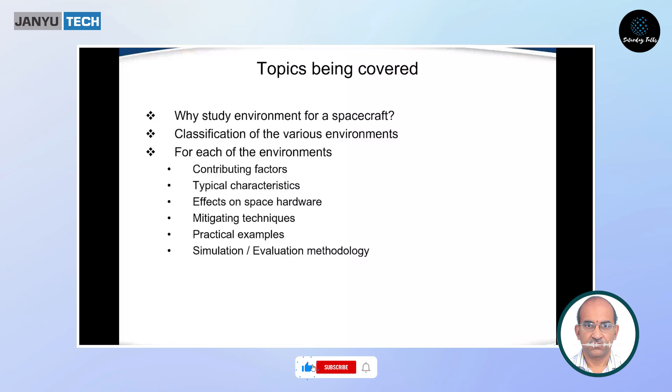If we take space history, many on-orbit failures when analyzed in a particular period, out of around 3,000 anomalies, 20 to 25% are traced to anomalies directly related to environment interaction—either the environment was not understood correctly, or it was not designed for that environment, or not analyzed for it, or not tested in that environment. So it's very important, if you are developing any product, to first understand the environment, then understand its impact, then design for it, analyze, and test before putting the product to use. Otherwise, we are bound to see failures.

Though considered perfect vacuum, space still contains significant amounts of neutral, ionized, charged matter and electromagnetic radiation. This matter has a very good potential to interact with spacecraft elements and impact mission effectiveness, and it can limit the life of some hardware. Studying this helps us possibly mitigate the effects, and it also provides inputs for environmental design, where you cannot design the equipment for absorbing that environment.

Then it should be possible to design it such that the system is insulated from the environment. Temperature is one such factor. If we cannot design for the total range, at least we can ensure that the thermal design keeps the equipment within its margins.

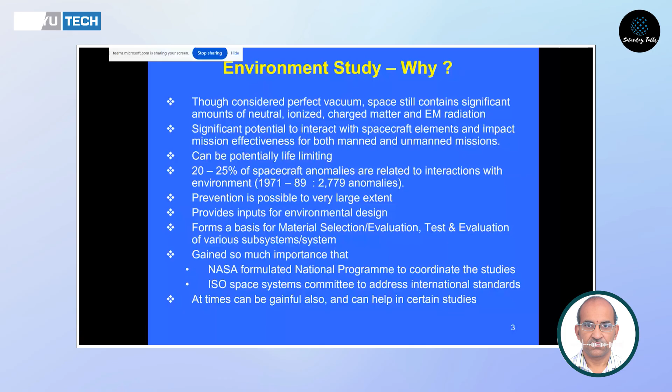At times, these environments are not always harmful. Some of them are actually useful, and we can use them gainfully for certain particular aspects. So if we talk about a spacecraft, the environment can be classified into three major categories.

One is the pre-launch environment: before launching, on the ground, whatever we are doing, during transportation, handling, regular ground testing, and storage. Even after the spacecraft is made ready, sometimes launch may take place after a while, so storage conditions matter. In the pre-launch environment, the major factors are temperature, humidity, and electrostatic discharge.

Even with clothes, during certain seasons, if humidity is low we get a slight shock - that is due to electrostatic discharge. So ESD is another environment factor. It is prevalent on the ground, and there is another kind of ESD in orbit which we will also discuss.

Particulate contamination is another factor, since some equipment needs to be assembled and operated in a very clean environment. Unless we seal that equipment appropriately, during fabrication and before sealing, contamination control is another important aspect as far as the pre-launch environment is concerned.

With respect to launch, this is the actual period of rocket flight to go to space. While taking the spacecraft into orbit, the launch vehicle will take it to orbit over 20 or 30 minutes, whatever the duration.

During that time, the temperature changes, the pressure decreases as we go higher, there is acoustic noise associated with the spacecraft, random and sinusoidal vibration, and shocks that happen during various stage separations. The actual spacecraft separation from the launch vehicle is itself a major shock-inducing environment, so all these aspects have to be considered.

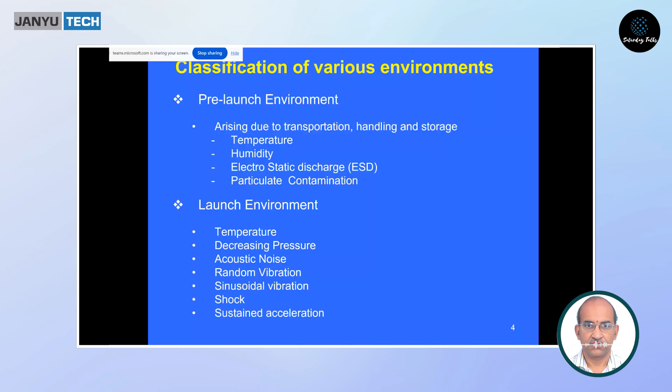The most important of all - though all are important - is this: a spacecraft is going to live in that environment for 15 years. If we take a geosynchronous orbit, the spacecraft has to operate for 15 years without being attended to.

That is the major challenge as far as spacecraft is concerned - for 15 years it has to work in this unknown environment without being attended to, except for some regular housekeeping operations. Some commands may be given, but we cannot go to the spacecraft, access it, or repair anything.

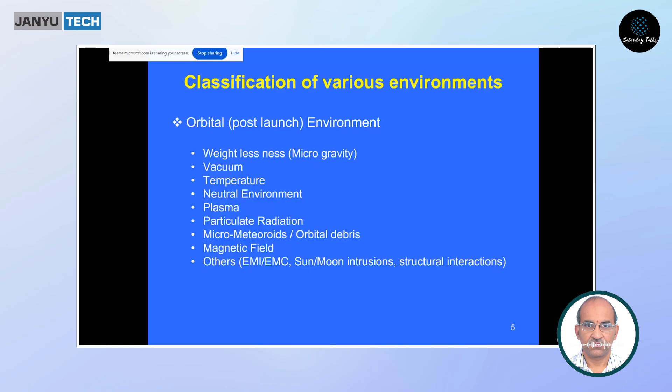Under the orbital environment, the obvious thing is weightlessness, which we see in any space station, with astronauts struggling due to microgravity and its own impact. There is also vacuum, temperature, neutral environment, plasma, radiation, micrometeoroids and orbital debris, which is much talked about these days, and the residual magnetic field itself - as you go away from the ground, the field becomes inversely proportional to orbital height, following the inverse square law. Other aspects like EMI, EMC, sun-moon intrusions, and structural interactions also have to be considered.

With respect to weightlessness, the contributing factor is the balancing of gravity by centrifugal force, because the spacecraft is orbiting around the Earth, resulting in zero G, or near weightlessness.

So that is the factor which contributes to the weightlessness. And what are the characteristics of weightlessness? At 400 kilometers, 88.8% of its gravitational field still remains. So absolute weightlessness is experienced if the sum of all forces is zero at all points of an object, which is not practical due to the finite dimension of the spacecraft body.

There is a theory around that, but what are the effects basically? We have got some deployment mechanisms in the spacecraft. Their behavior will be affected, because on ground when we are doing assemblies, it is all at G level, but in spacecraft it is zero G. So all our ground testing is affected, because you cannot design your hinges and all to withstand 1 G, since that becomes an over design.

Weight is another important factor, so we will not be doing the over design. So then how to test it on the ground? That is an important aspect. That's why we are having zero-G simulators and all those aspects.

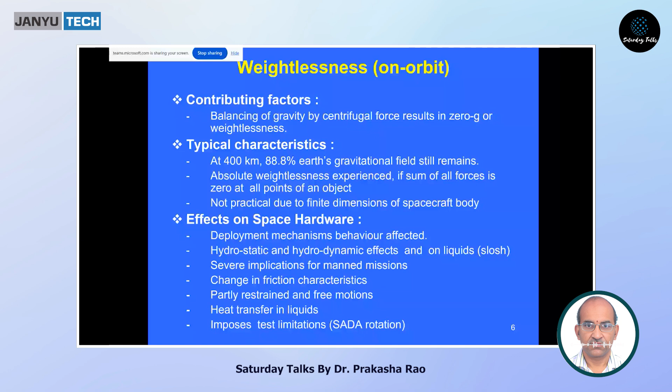Then there are hydrostatic and hydrodynamic effects on liquids. How a liquid behaves in weightlessness will be entirely different from when G is there. Gravity is pulling the liquid and it has a formal shape, but once it is not there, if there is a little bit of vacuum space, empty space, in the tank, the liquids will be sloshing.

So even our tankers, like milk tankers, petrol tankers, or anything that carries these fuels, the slosh effect is a very significant aspect once you empty it to some extent. Even if you carry one pot with water, if it is half filled, the slosh effect can be felt. Then under severe conditions and under vacuum, it becomes worse.

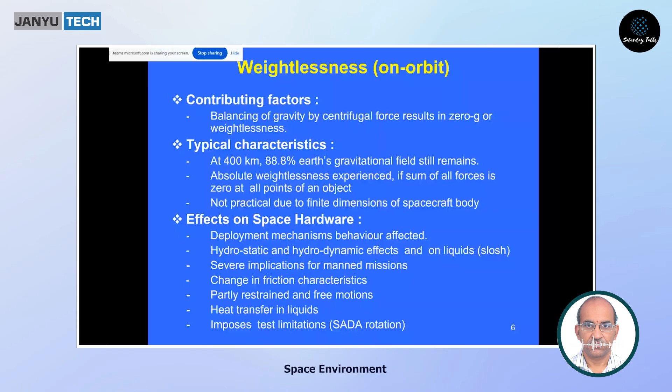There are severe implications for weightlessness, and it becomes worse with severe implications for manned missions, because the human body is designed for a G environment. So all the activities which we do effortlessly on ground, right from the time we get up till we sleep, become very major activities when we have to do them in space. Accordingly, the systems have to be designed.

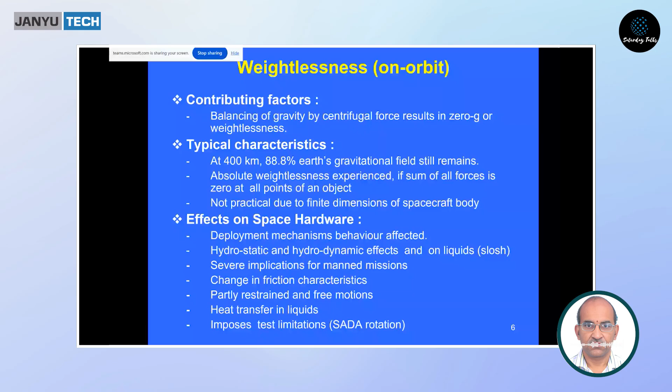Then there are frictional characteristics, because of bearings, lubrication and all those aspects, when G is not there. Those frictional characteristics have to be seen, partly restrained and free motions, and liquid heat transfer mechanisms will be impacted. It imposes test limitations, like for the solar array drive assembly, which we test on ground, it is difficult to test because zero-G simulations are difficult. Otherwise, the solar array drive bearings and slip rings transfer 10 to 20 kilowatts of power, generated on solar panels, into the spacecraft electronics. This happens through slip rings and all those things, so weightlessness imposes some limitations on those testings.

We overcome this by various mitigation techniques. With respect to slosh, you cannot do anything on ground, but it has to be modeled and the impact has to be studied. That is what they do for propellant tanks. There are also some vanes designed to reduce the impact of slosh, so this requires a lot of mathematical foundation.

We have to design for zero-G loads, and also for training of crew. That's why they spend years to train a crew, because of zero-G they have to get used to that, and for that, various simulation facilities are there. Training of crew is another important aspect.

Baffles and vanes are used to dampen oscillations due to liquid movement in propellant tanks. But with respect to electronic hardware, the impact of weightlessness is not much, it's not really there. It is mainly with respect to mechanical systems, bearings or hinges and all those designs.

So there we have to account for the weightlessness environment. With respect to simulation or evaluation methodology, zero-G simulation is for mechanisms, and testing in aircraft with scale model tank simulation is for parabolic flight paths, where at the vertex we can get zero-G. Even in a giant wheel, just when we are about to change direction, we feel a zero-G effect for a very short duration on ground. But there are ways to simulate this, like taking a parabolic flight path to test certain systems.

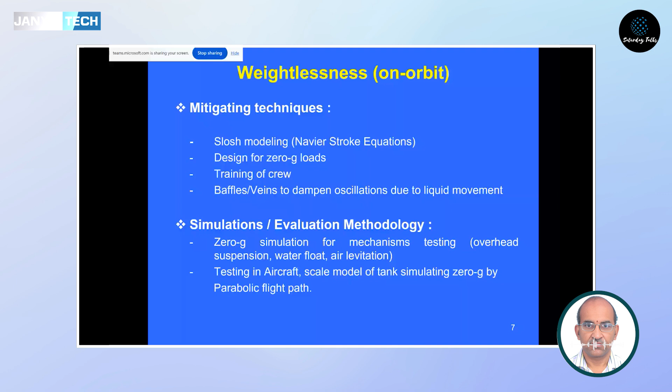That is one way, but otherwise, in general, zero-G simulation is quite involved. Then the most predominant environment, especially for electronic systems, that we have to consider most is the vacuum. Because the contributor factors are: not directly electronics, but vacuum has impact on temperature that will in turn affect any electronic device.

So pressure drop with altitude. At sea level, the pressure is 760 mmHg, that is 760 torr, since 1 mmHg is called a torr. In terms of mean free path, at that pressure, the intermolecular distance is 5 into 10 to the power of minus 4, that is 0.5 mm. So between two particles, the distance at sea level is 0.5 mm.

But as you go to 200 kilometers, the pressure will drop to 1 into 10 power minus 6, and the mean free path is 50 meters. Why this mean free path is important is because when we want to simulate vacuum, it is that mean free path which we have to simulate. At 900 kilometers, 10 to the power of minus 6 torr is the pressure, and the mean free path is something like 500 meters, half a kilometer between two molecules. At 10,000 kilometers, you can see it's almost, you cannot see the distance.

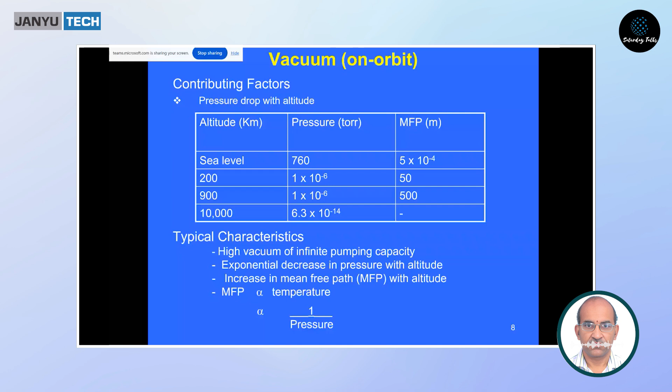So typical characteristics of high vacuum is infinite pumping capacity. The moment you throw some object into space, you can think that you have thrown it into a pump where the pumping capacity is infinite, so whatever is there can be sucked out. There's exponential decrease in pressure with altitude and increase in mean free path with altitude, and the relations are here.

Differential expansion and contraction joints of dissimilar metals. Changes in frictional characteristics will happen due to temperature. And in electronics, increased failures - the failure rate, even we, if we get heated very fast, we get all kinds of diseases, correct? That is the result of thermal impact, so the life will come down with respect to electrical parameters. The Arrhenius reaction rate model describes the impact of life with the temperature.

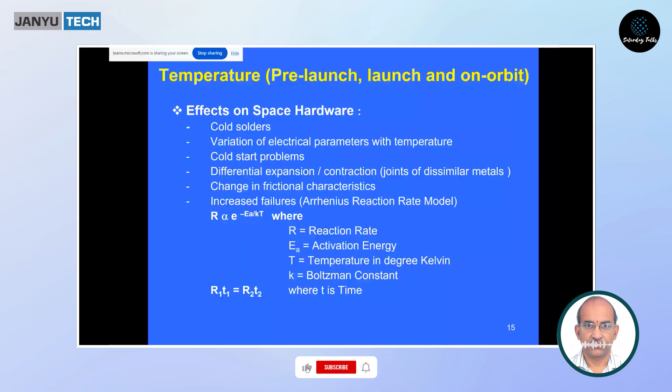The most important aspect is thermal design has to be proper to maintain the subsystems under safe operating limits. And derating - what we do is, if a component is rated for 1 watt, we will be using it for half watt only. If it is a 200 volts capacitor, use it for 100 volts. This is to extend the life.

Temperature compensation provision for sensitive elements, design qualification to ensure margins - what we do is the qualification model will be built where we overestimate temperatures, give sufficient margin, and test so that the design margins are ensured.

Simulation-wise, thermal and vacuum combined can be tested in thermal vacuum test. But in vacuum, as I told, it can go to 10 power minus 12 torr also. Simulating that kind of mean free path, which we told is 500 meters or much more, how do you simulate in a finite chamber of half meter size? You cannot simulate this kind of mean free path. So even 10 power minus 4 torr or 10 power minus 5 torr, we are able to simulate on the ground, so that if we are able to do most practical applications, that is adequate.

Thermal balance test is done to evaluate that our thermal design is correct. Under thermal balance, what we do is one side we simulate sun, solar radiation, another side we simulate Earth's albedo, and solar is simulated by a xenon arc lamp simulator.

We also simulate the spacecraft itself going through summer solstice, winter solstice, equinox, and all those things. For all of those aspects, the spacecraft will be rotated to simulate the angle between the orbital plane and the equatorial plane, whatever angle is there, and the sun angle also. Sun will be changing even every day - if we dry our clothes, we know sometimes sun will come this side, sometimes south, sometimes north.

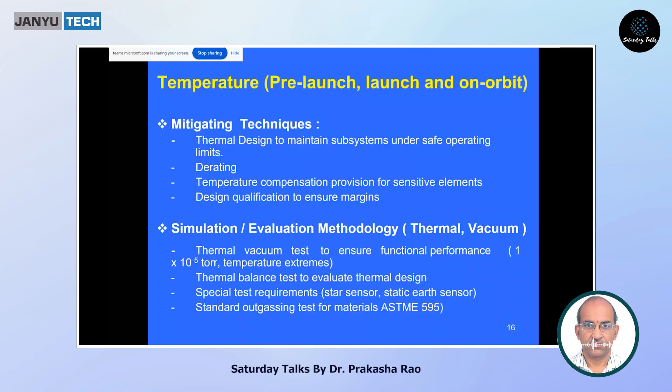Slowly it will be drifting, and that will all change the thermal design. So for simulating that motion, the spacecraft will be mounted on a rate table and the required angles are given to create various seasons for testing.

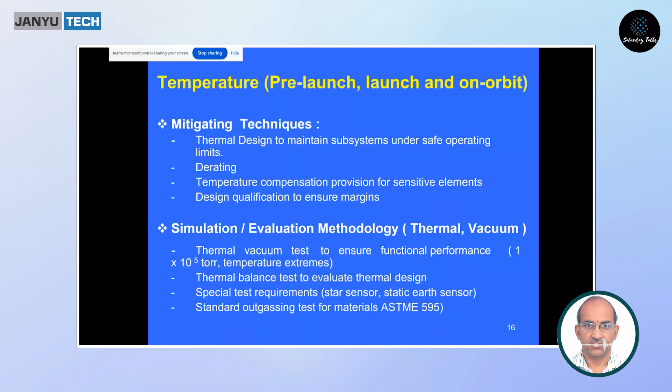Special test requirements are there for star sensor and static earth sensor, and standard outgassing test for materials. These are all done. Then we talked of temperature, vacuum, weightlessness. Now we are coming to the particles.

There is a neutral environment. Contributing factors are neutral atmospheric density. At low Earth orbit, it will be 10 to the power of 15 oxygen atoms per meter cube. High orbital velocity - though they are oxygen atoms, so size may be small, but kinetic energy will be there.

8 kilometers per second orbital velocity will be there for those particles, and a large number of collisions will be happening between them with ambient atoms - that will be 3 into 10 power 22 collisions per hour per 1 square meter of spacecraft. So they are constantly impinging on the spacecraft outer surfaces. This is significant in low Earth orbits.

And atomic oxygen - that is a very, very corrosive element. It is prevalent up to 650 kilometers, and it's a function of solar cycle.

Solar cycle, I think people will be knowing. The sun has got a cycle of 11 years approximately. So the environment, the sun's intensity or whatever its own ferocity will be changing as a function of solar cycle, depending on which part of the cycle we are in.

Above 650 kilometers it is less, but especially around 400-500 kilometers it's significant - that's why we don't keep those things there. Atomic oxygen effect will have a very severe impact on the solar panels and all.

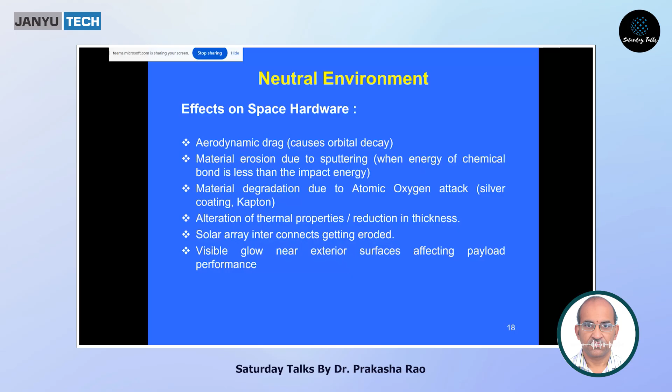Effects wise: aerodynamic drag, as particles are constantly impinging, causes orbital decay and it will slowly degrade, coming back to Earth's atmosphere sooner. Material erosion due to sputtering, material degradation due to atomic oxygen attack, especially on silver coating and Kapton - these are done to overcome those things.

But silver as such can get a very fast reaction, so alteration of thermal properties, solar array interconnects get eroded. Visible glow also - sometimes on payload performance you can visibly see a glow.

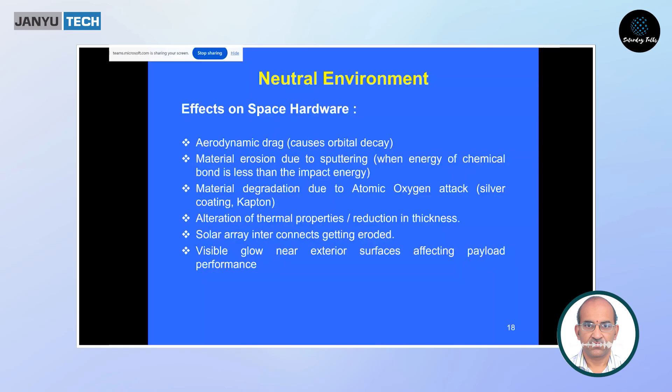So mitigating techniques: of course material selection has to consider atomic oxygen resistance, glow characteristics, sputtering thresholds, configuration to minimize the drag by flying the vehicle. Dynamically, aerodynamically, you have to design such that the impact of these particles on the drag is minimized - whatever the direction of particle impingement is, you would fly with a different angle so that the impact is minimized.

Orient sensitive surfaces and optical sensors away from RAM direction. Use protective coatings, and choose orbit to minimize effects. Proper sizing of propulsion and control elements to take care of these impacts - these are all the mitigating techniques.

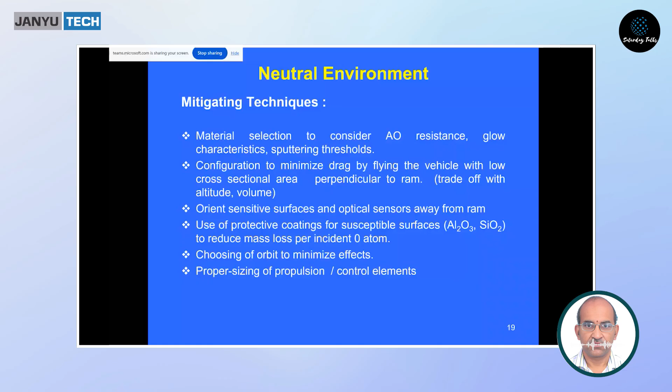So how to simulate a neutral environment? Theoretical analysis for expected mission profile is one aspect, and atomic oxygen impact test can be done in limited controlled conditions using particle accelerators, which can create the 5 eV energies associated with orbital impact kinetic energy.

This is at a material level - total spacecraft or equipment cannot be tested. At material levels, these studies can be done.

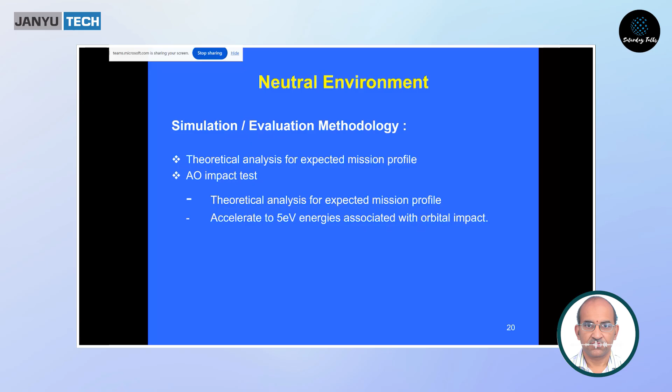So we talked about all this orbital neutral environment - it was not having any charge. But now we are moving from neutral environment to plasma. Plasma is produced by heating of a gas. When an atomic electron receives enough energy to escape electrical attraction to the nucleus, this produces a mixture of negatively charged electrons and positively charged atoms - so you are having ions here.

It's produced by photoionization from solar ultraviolet radiation, causing ionization of ambient neutrals, and by transport from other regions, and it's also a result of geomagnetic storms. Plasma can be defined as a gas of electrically charged particles in which the potential energy of attraction between a typical particle and its nearest neighbor is smaller than its kinetic energy.

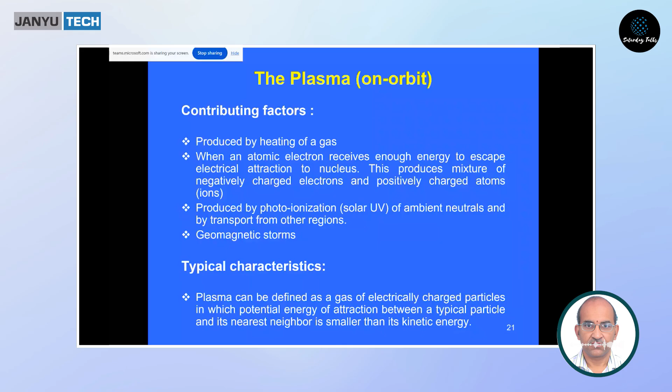This is how plasma is produced. If kinetic energy is less, they recombine, establishing neutrality. But 99% of the universe is plasma. During geomagnetic storms, higher energy plasma is encountered between midnight and 6 a.m. So for spacecraft orbit - earlier I told about the effect of electrostatic charge on ground, like handles also in dry places.

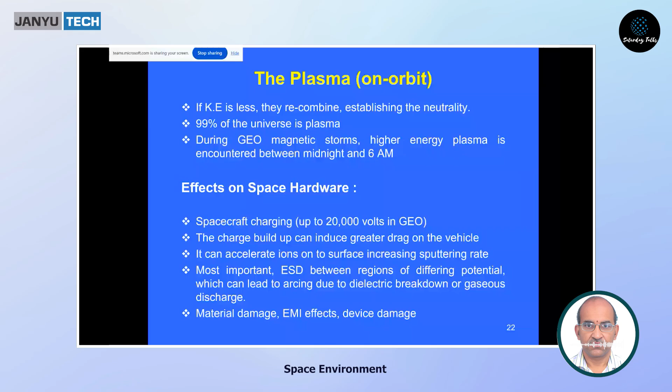If you go to other Western countries where humidity is not there, if you touch a handle, unless it is grounded, we can get an electric shock. Our clothes, when we take out, that is a very normal thing, our hair, you can get a shock. So that is on the ground, that is a triboelectric effect.

But here it is spacecraft charging. This is due to buildup of potential, because the outside surfaces are dielectric, and these charged particles are impinging on that. So the outer surfaces, potential will go up, and it can result up to 20,000 volts in geo. Here it is a potential difference.

Why does the potential difference come? When the surfaces are not equipotential, that means they are not conductive. If you have a perfect metal sheet outside a spacecraft, there is no problem, because all the charge will be uniformly distributed. Even if it is 100,000 volts, no problem. Like crows on an electric wire, they are safe till they touch a second wire. Only when it touches neutral, it will get killed. So as long as it is equipotential, no problem, whatever be the charge.

But that is not possible because we use all kinds of surfaces on the spacecraft, so there can be differential charges produced. Once there is a differential, electric arcing can happen. That is where electrostatic discharge will happen, and that arcing will produce such high currents which can kill the electronics inside the spacecraft.

So the charge buildup can induce greater drag. It can accelerate ions to the surface, increasing sputtering rate. Most important, ESD between regions of different potentials can lead to arcing due to dielectric breakdown or gaseous discharge, then material damage, electromagnetic interference effects on devices. Nowadays microelectronics is so small, devices have gone below micron level, submicron level, so they can easily get impacted by the effects of electrostatic discharge.

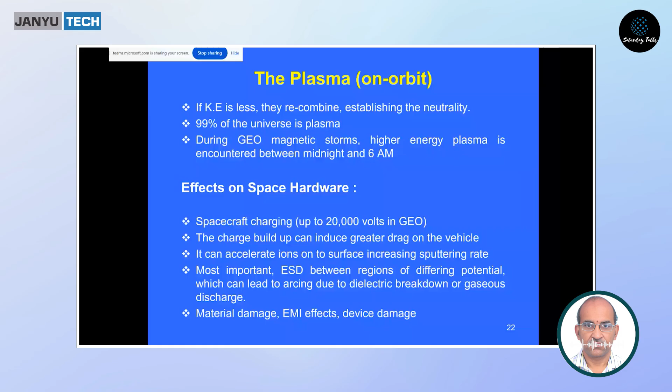So for plasma on orbit, how to mitigate: make exterior surfaces of uniform conductivity if possible, because in some cases it's not possible. Then we put some buttons, and grounding outside — you intentionally create some small buttons and connect all of them through a wire or something, so that outside things get neutralized. Whatever plasma is impinged, the differences in potential are avoided. And there is grounding, EMI shielding and filtering for all electronic circuitry, and active current balance by a plasma contactor.

This is an active method. Other things are passive. Or grounding of all unused wires — simply one wire without grounding, if you leave it floating, this can spoil the equipment inside.

We saw this ourselves. We faced it in our first communication satellite, INSAT 2A. A big instrument like VHRR had one floating wire. Later we traced that it was affecting control system performance.

So for ESD testing, there are different testing methods and equipment available to create ESD — radiated discharge, single point discharge, structural current discharge. I'm not going to explain each of them, but there are methods available which you can use to create and test for these factors.

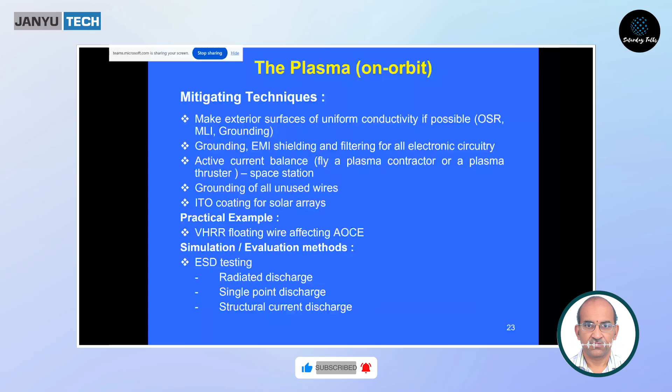Then comes particulate radiation. Earlier we were talking about the charged environment; here these are particles. Trapped particles are there, something called Van Allen belts, at particular heights and between certain latitudes or longitudes. The name is given by the inventor of those belts. So trapped particles are there.

There are high energy particles, solar protons, having very high energy. Cosmic rays, which are of galactic origin, coming from distant stars and all that. Solar wind itself is there, and low energy charged particles, which are trapped in the geomagnetic field. And there is a very specific region called the South Atlantic Anomaly, an anomalous region where these particles have much higher densities.

Typical characteristics are: it consists of energetic charged particles, having energy and charge also — electrons, protons, neutrons, heavier ions and photons. All the types of things are there. X-rays, gamma rays can penetrate through the surface layer into the material underneath. Even if you have a surface like an aluminum box, still they can penetrate through that also, because they have lots of energy. The energy level and flux are highly dependent on orbital height, location, and time.

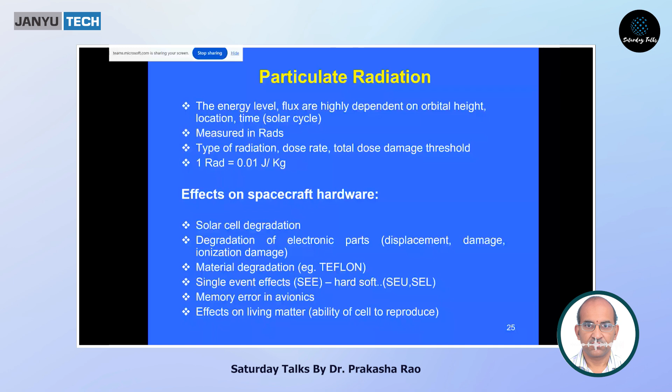So when required, we build what is called radiation hardened electronic devices, and they are very expensive. Just to give an example, a normal FPGA may cost a few hundred or thousand rupees. If it is radiation hardened, it will cost 25 lakhs versus 25,000 or whatever. That is the kind of cost difference when they get radiation hardened, because the quantities are less, the consumption is less.

And here the thing has to start from the wafer level. So you have to have a separate line for producing these quantities. Very small quantities for producing these devices, but you need to have a separate fab. So that's why it becomes so expensive.

Effects on the spacecraft hardware are solar cell degradation, electronic parts and material degradation, and single event effects. What this means is suddenly when a particle passes through these devices, like RAM and other memory devices, at one particular location a state change will happen.

But if that particular location happens to have some software code, your program can misbehave. So then how memory error in avionics affects living matter, the ability of a cell to reproduce. Human beings also, you would have read a lot nowadays with all the people going there. So there is an impact of radiation on human health also.

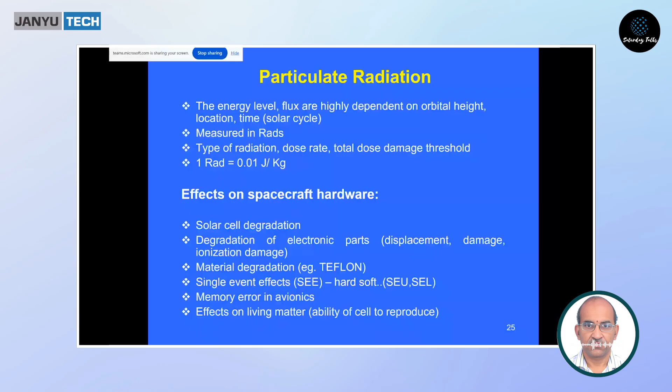So how do you mitigate? One is radiation shielding. There are some materials like lead which absorb radiation much more effectively than steel or something like that, so even a small thickness will help, but the penalty will be the weight. Another is the use of rad-hard devices with specified total dose, where the penalty is of course cost.

And there are other things to avoid software failures due to memory corruption. We use majority voting, error detection and correction, watchdog timers, and safety logics. The problem with EDAC and majority voting is, if you want to put majority voting, you have to compare 2 out of 3 and take a decision.

Then your hardware, if one is needed, because you have put majority voting, it has to be tripled. So the devices, the hardware will be tripling. That is the kind of impact. But if you have to survive for 15 years, you have to do that. That's why space systems become so expensive.

Practical examples, okay, I'll skip this. Particulate radiation - then how do you simulate?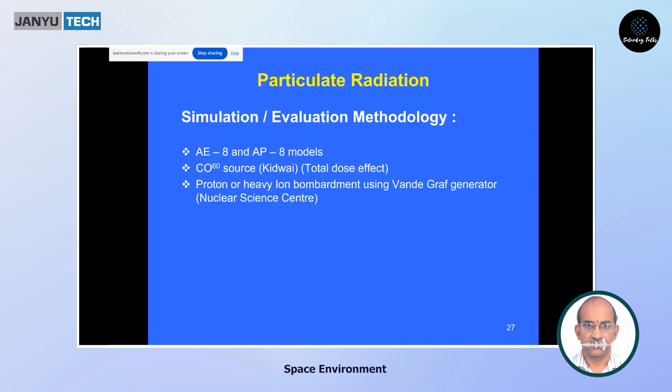Then proton or heavy ion bombardment using a Van de Graaff generator at the Nuclear Science Center. So there are methods. Then micrometeoroids and space debris.

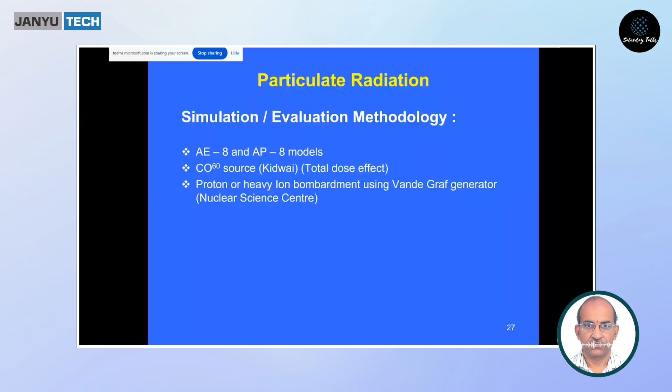Micrometeoroids are natural, nothing you can do, they are there. Space debris is man-made. So how do we handle it?

Breakup of comets, asteroids, leftover pieces of non-operational spacecraft, boost stages. Even rockets, once they go out of the sphere of influence of Earth, the stages are still floating, maybe for a month or 15-20 days. Till then it is debris - it is an environment. If you are launching another spacecraft, it may hit it.

Up to 0.1mm, thermal blankets or structural panels can take care of it. But beyond that, it's difficult.

Orientation of sensitive surfaces away from ram, Leonid shower, and like that. When it happens, our spacecraft centers will do operations on the spacecraft to move them away from the most predicted zone. And choice of orbit is important.

Shielding by a bumper on the leading edge is not done for regular spacecraft, but for human space missions, because life is involved. So that shielding is there.

Avoid using single stage to orbit boosters - these are guidelines, these are all conventions. Whether people follow them or not, China doesn't follow them. Longer life satellites, so that debris will come down. Venting fuel tanks at the end of mission - venting means removing the fuel.

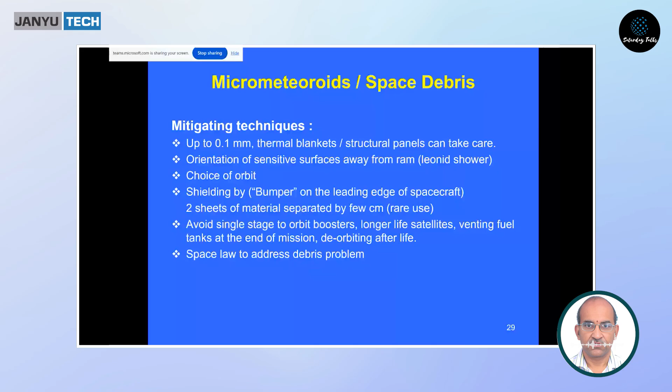Practically, 27 windows were damaged in 8 flights of the shuttle out of 30 missions. On STS-7, a 0.2 mm diameter fleck of paint impacted a side window. Cost of refurbishment was $50,000.

So this is from some book I have taken—simulation and evaluation methodology, hypervelocity impact studies, Van de Graaff accelerator. You can see the level of acceleration achieved, 40 kilometers per second on a particle of 10 power minus 10 grams. I don't know how they do it, but there is equipment available to do that. Larger masses are accelerated through light gas guns. There's study of shock wave propagation by numerical methods, and impact probability studies—models are available for estimating the flux.

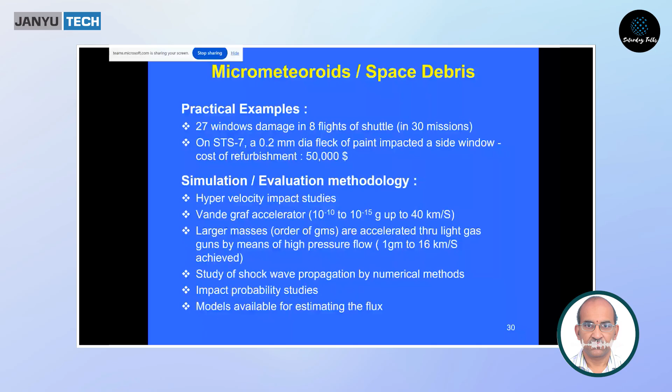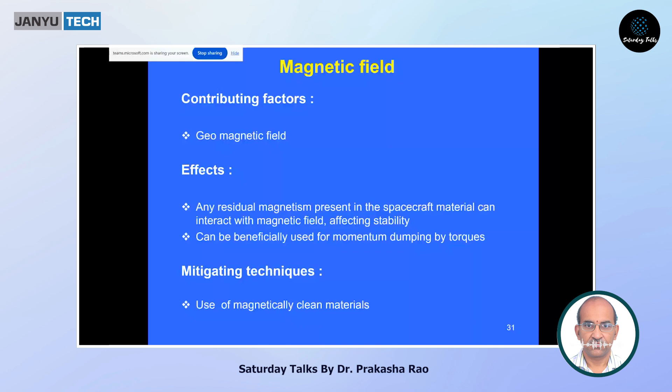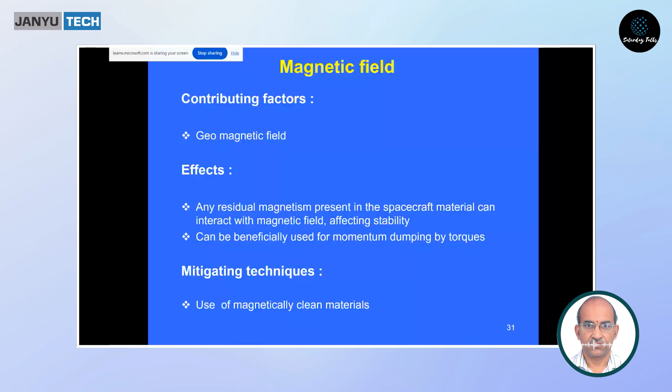Then the magnetic field, as you go away, as I told, inverse square law makes it lesser and lesser. But in geosynchronous orbit at 36,000 kilometers, we can also use that positively. Within the spacecraft, we should use magnetically clean materials, but elsewhere we use it for control of the spacecraft because residual magnetic field is there. One magnetic torquer will be there through which we pass the current, and that will interact with the Earth's magnetic field and produce a couple which turns the spacecraft, because the disturbance forces are less. So even a small magnetic field is sufficient to maneuver the spacecraft.

Then pre-launch—I think I'm getting closer to the time, so I won't explain much—but on ground we have particles in the ambient environment, so contamination control is one important thing. And electrostatic discharge, ESD—even if you touch an electronic device, it will die without doing anything, just by hand touch, if you are carrying electrostatic discharge on your own body, because it can be kilovolts, and that can kill the electronic device. So for that we have ESD-specific precautions. We have to ensure that before we enter, the charge on our own body is grounded. So all the handles, the floor on which we walk, and the tables on which we assemble electronic equipment—all of them have ESD precautions taken, with equipotential mats and so on, so that everything is conductive. Conductive means not a metal plate, that would discharge too fast—there are some specific ranges. What is the conductivity, the resistivity—accordingly you bleed off the charges that are there, so that the equipment we are handling is safe.

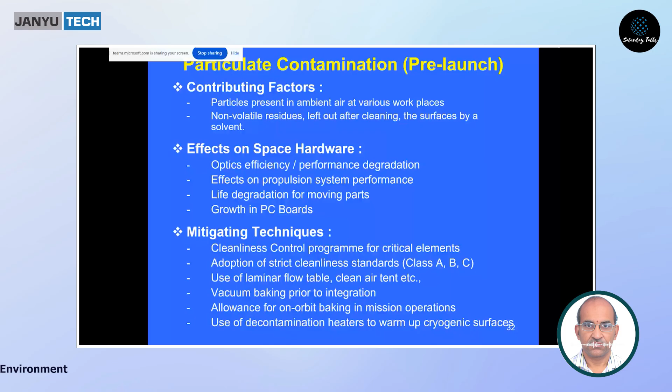Humidity is the worst environment. That is the only good thing about space—there is no humidity. Otherwise, in most of our household equipment, things go bad due to humidity. At the sea coast it is still worse because humidity also carries salinity. So at the time of fabrication, testing, storage, in environmental facilities, we do humidity control also—that is important. It is more difficult to do in coastal places, so the expenses involved will be more.

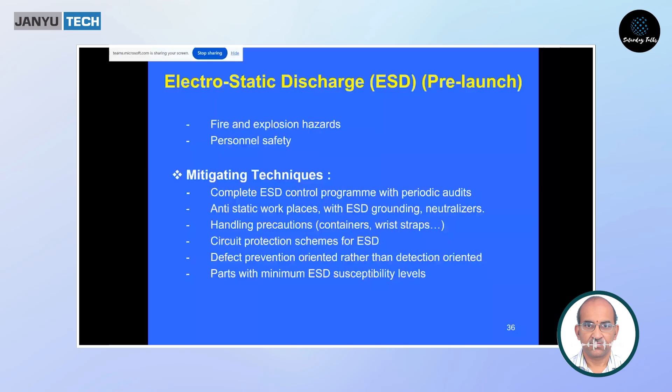Effects on space hardware, I will not elaborate too much—same way electrostatic discharge I have already told. Dynamic environment is one thing. During the launch phase, there is transportation involved, and compared to launch vehicle induced dynamic environment, transportation effects are less. Of course, Bangalore potholes—anything can happen.

Launch phase loads are acceleration transmitted through the launch vehicle interface, and direct acoustic noise through the shroud, and shock during events triggered by pyrotechnics like stage separations. Spacecraft separation is the most important trigger for shock. Acoustic noise is generated by sources such as rocket engine exhaust noise, boundary layer turbulence, base pressure fluctuations, and oscillating shock waves—actually it's not my area, so I'm only reading here. Its predominant characteristics are frequency distribution and spatial distribution—how it gets propagated over the entire vehicle or spacecraft. So those are the things which have to be studied.

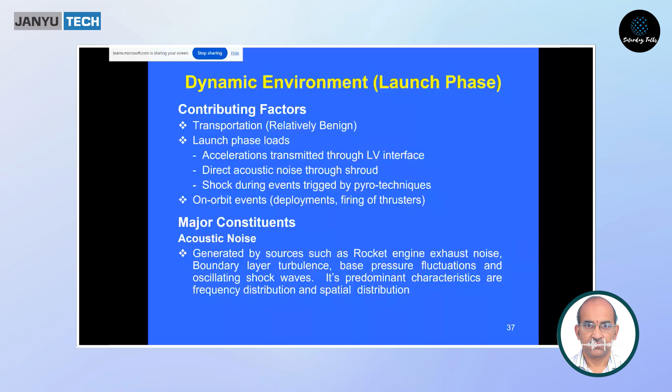Then random vibration, sine vibration, shock—all these effects are there. Of course, vibration impact is very well known; it can cause mechanical damage to components and units.

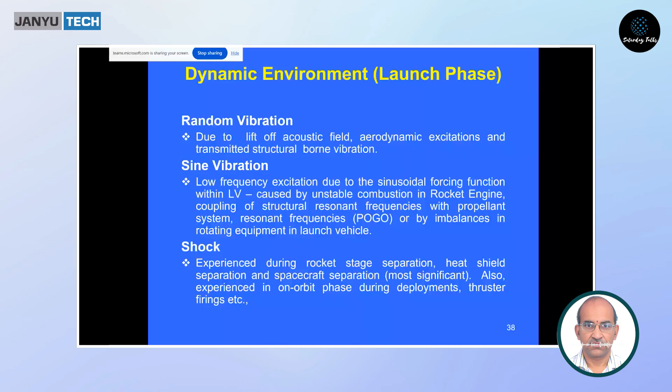Even before you launch and inject the spacecraft into orbit, the damage would have been done if it is not designed to withstand that dynamic environment. So we have to design for predicted loads, qualify, test, and for some sensitive components, due to vibration, we have to do what we call potting - basically an adhesive to arrest them during the launch phase. Snubbers are vibration isolators for very selected items where other techniques are not useful. But design of a vibration isolator itself is a very challenging thing.

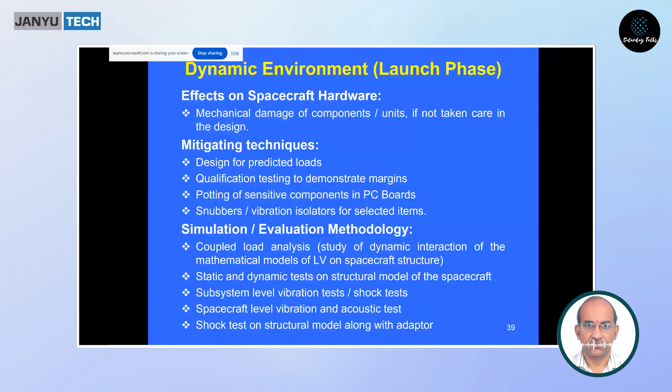In the simulation, the spacecraft mathematical model is given to the launch vehicle people. They combine the launch vehicle mathematical model with the spacecraft mathematical model and predict the loads that are going to be faced at various sites of the spacecraft - on each panel, at each location, what are the expected dynamic loads. Based on that prediction, the individual equipment have to be tested with margins for the predicted environment.

Sir, namaste. Sir, with this kind of environment in space, the reuse of vehicles - how expensive is it, and what are the things we are doing on reuse of space vehicles, sir?

The reuse is mainly with respect to the launch vehicles. Launch vehicles are not going to see any of this on-orbit environment - whatever I told is for launch phase and pre-launch. After launch, it comes back much before, within half an hour. Whatever on-orbit environment I told is for 15 years, so the question of reuse is right now not there for spacecraft. The reuse is only soon after launch, mainly the first stage - within minutes it comes back. There, you don't want to lose the rocket shell, the structure and all those things. Only the fuel is spent, rest of the things are alive, so those are what you try to reuse.

So there the important part is re-entry. The most difficult portion of reuse is the re-entry of the vehicle, because during re-entry it is going to see a lot of heat when it enters the atmosphere back. When entering, it has tremendous kinetic energy passing through the atmosphere that produces thousands of degrees centigrade. So what they do is use a heat shield, what we call ablatives, to ensure the inside things are not impacted due to re-entry. So reuse with respect to our own program, we have done it only at a very elementary level.